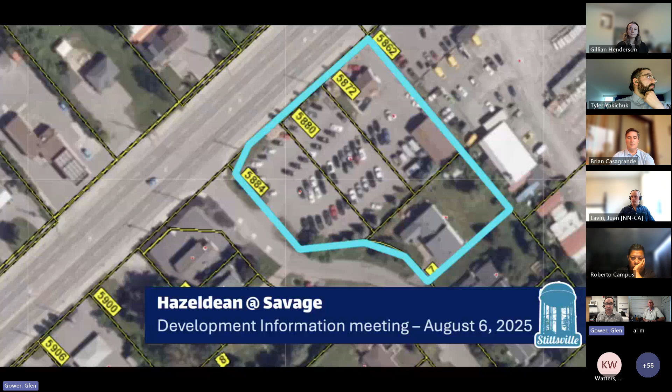There's a map there on the screen showing the location. I know there's a ton of community interest in this, so I really want to thank residents who've taken the time to join us this evening and to participate. I'll introduce you to the developer team in just a moment, but first I want to go over an agenda for what's going to be covered in tonight's meeting.

So this is about a proposed development at Hazeldean and Savage. There's 3 separate properties on Hazeldean Road and 1 property on Savage Drive. So tonight we're going to have a presentation from the developer's team, but the bulk of the meeting will be an opportunity for residents to ask questions and get more information about this development.

So when we get to that Q&A section, there's a few ways that you can participate. If you have a question or comment, you can raise your hand using Teams, and we can give you the microphone to ask the question directly. Or if you're more comfortable, you can type in your question on the Q&A panel that's on the screen. Kara from my office is helping to compile the questions, and I'll read out those questions on your behalf to the developer team so that they can answer those.

We're going to answer as many questions as we can during the time that we have. We also have some questions that were submitted by residents beforehand that we'll also include. And then any comments we receive either through this presentation or offline, we'll be compiling that and sharing it with the applicant team, developer team as well.

We are recording this, so a video will be posted to my YouTube channel after the meeting, which will also be available on my website, glengower.ca. At any time, if after today's meeting you have any questions or comments, you can contact me by email, usually the fastest way to reach me, at glenn.gower@ottawa.ca.

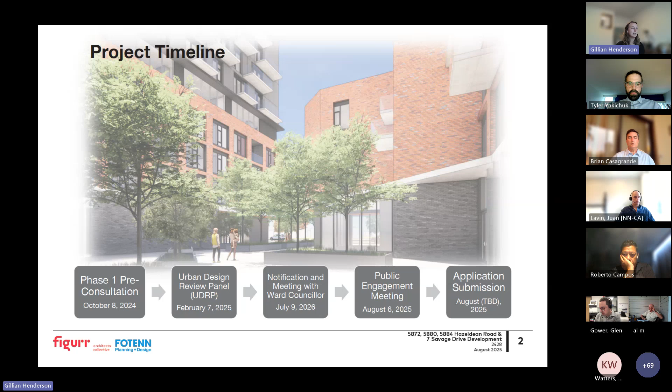I'll start with a quick overview of the project timeline. Back in October 2024, the applicant team met with city staff for a pre-consultation to go over the project and clarify application requirements and next steps. In February 2025, we presented the proposal to the Urban Design Review Panel for feedback on the design, which was incorporated into the next architectural iterations. In early July, we informed Councillor Gower about the project and met with him to discuss the application. Today, August 6th, we're holding the first public information meeting to share information, hear your feedback, and answer questions. Finally, we plan to submit the application later this month.

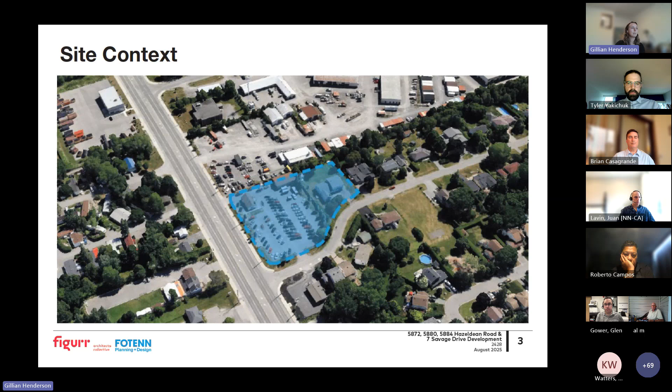The subject property is located at the southeast corner of Hazeldean Road and Savage Drive intersection and is comprised of 5872, 5880, and 5884 Hazeldean Road, as well as 7 Savage Drive within the Stittsville neighborhood. The front portion of the subject property is currently occupied by an automobile dealership, while 7 Savage Drive is occupied by a single-story detached dwelling.

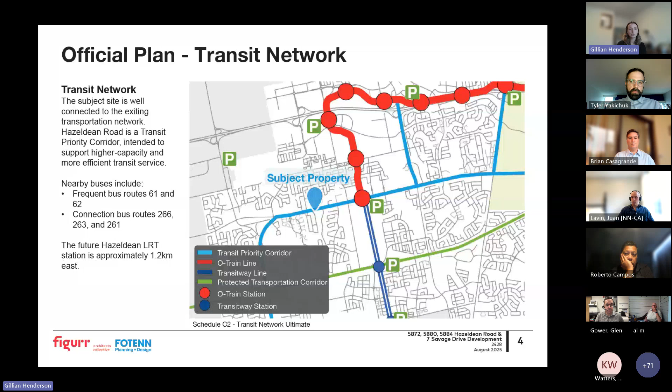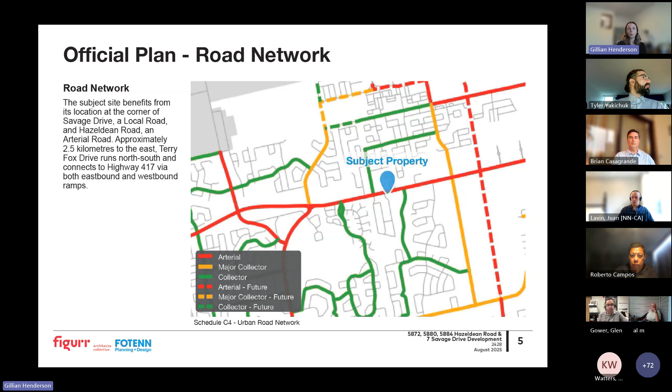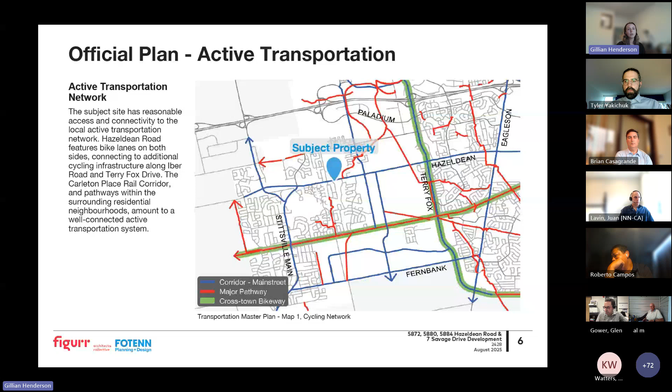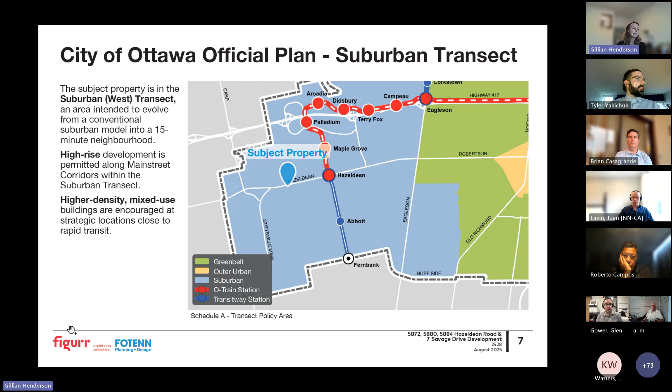The subject site is designated Main Street Corridor within the suburban transect. Main Street corridors shall provide a dense mixed-use environment with active entrances facing the corridor. Building heights up to 40 stories are permitted along Main Street corridors whose right-of-way is 30 meters or greater, and this segment of Hazeldean Road has a right-of-way greater than 30 meters.

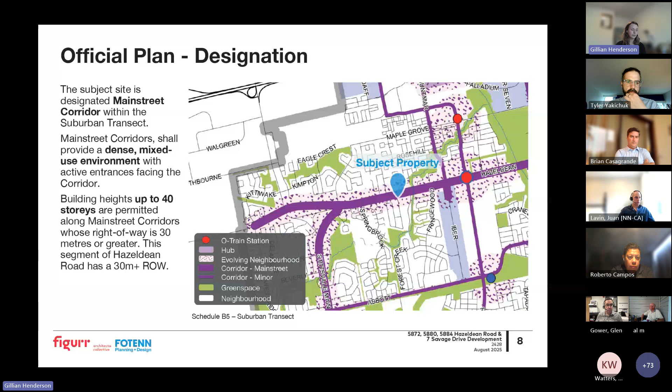The proposed development aligns with the current and planned context of the area, which envisions a dense mixed-use environment along Main Street corridors with heights of up to 40 stories where appropriate. This 3D massing model illustrates how the property fits within the evolving context based on existing policies. However, this will not happen overnight, and this is a very long-term view of what may occur over decades of gradual evolution. Additionally, the properties shown in this image may not develop as depicted in these renderings; these models illustrate potential built form under current policy and demonstrate how the proposed development fits within the planned and emerging context of the area.

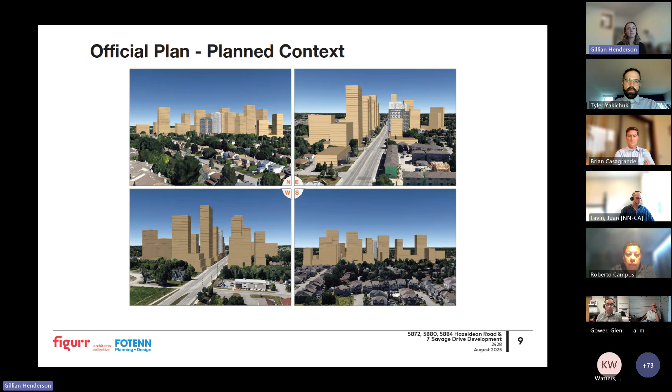The subject site is currently split-zoned general mixed use, subzone 14, with a height suffix of 11 meters, and residential first density, subzone D. The GM zone permits mixed-use development, including residential, commercial, and institutional uses, generally serving a broader area and allowing for larger occupancies, provided that potential impacts like traffic and noise are appropriately mitigated.

The entirety of the subject property is proposed to be rezoned GM with an urban exception. The amendments required to permit the proposed development are high-rise development, increased floor space index, reduced rear yard setback, and reduced minimum required resident, retail, and visitor parking spaces.

Under the draft new zoning bylaw, the subject site is split-zoned Main Street corridor, Main Street Zone 2, height suffix 11 meters, and Neighborhood Zone 2, subzone D. The Main Street Zone 2 will largely function as the updated version of the arterial Main Street zone from the current zoning bylaw. It allows for a broad mix of uses along wider main streets with larger lot sizes, including high-rise development, where it fits the surrounding context and also aligns with official plan policies.

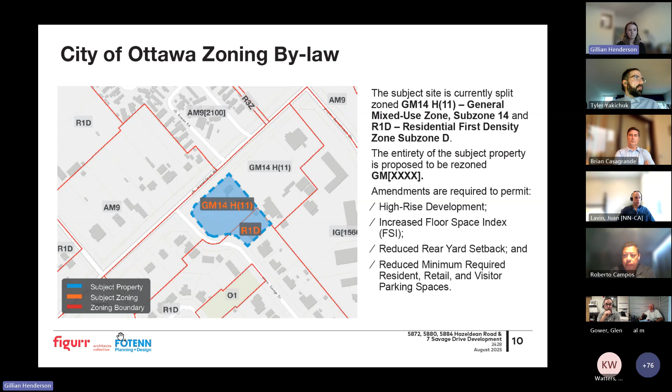The proposed height is supported by the site's location along a Main Street corridor, as well as the generous lot depth and area of this particular site, which make it suitable for high-rise development. A strong built form transition is achieved through a low-rise podium, strategic tower placement, and wide surrounding rights-of-ways, which provide ample separation from nearby properties.

The planned context of the area anticipates high-rise buildings of up to 40 stories along main streets in line with official plan policies.

From an urban design perspective, the building uses a tower floor plate of under 750 square meters to minimize shadow impacts, and the tower's orientation helps preserve views and privacy. The low-rise podium also enhances the pedestrian experience at the street level.

Furthermore, the proposal transforms an underutilized brownfield site into a vibrant mixed-use development that aligns with the city's vision for intensification along Main Street.

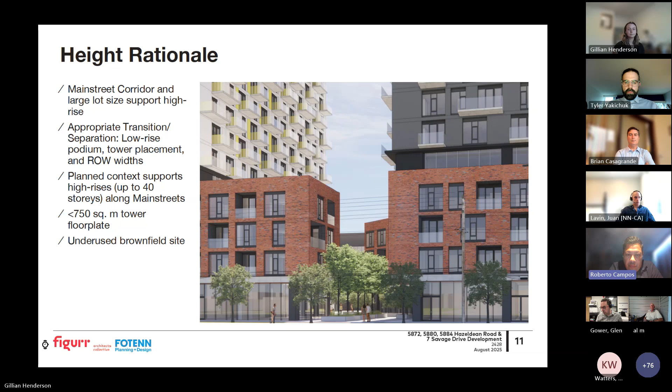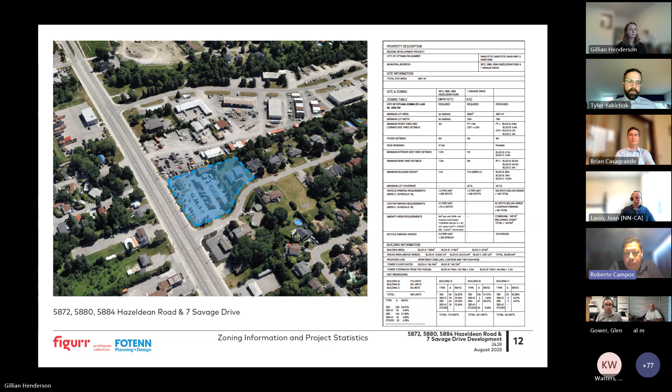As mentioned, the proposed site is located with two properties along Hazeldean Road and one at the rear of those properties at 7 Savage.

Here are some photos. The current use of the property is a car dealership and a single-family home at 7 Savage. Immediately to the northeast is another industrial-type used lot that includes a collision repair shop and also a granite supply store. You can see some photos here of the views along Hazeldean Road, and then the bottom two looking down Savage.

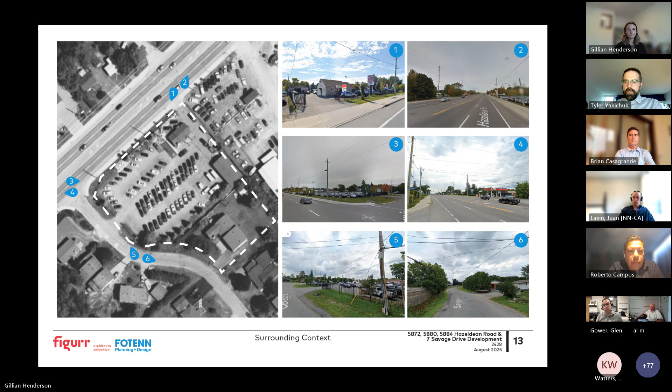The proposal envisions in total 3 buildings. What we're calling Building A, at the very intersection of Savage Drive and Hazeldean, is proposed to be a 19-story building, sitting on top of a 4-story podium.

What we also placed was Building C, a 4-story building, pretty much where the 7 Savage property would be. This helps to create a transition of the massing between the existing neighborhood immediately to the south, and as we transition north towards Hazeldean Road.

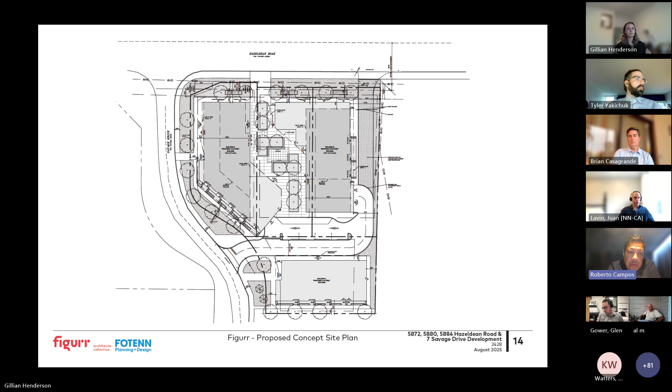This was part of the strategy in the overall site planning. As mentioned, there are right-of-ways and hydro lines that ultimately determine the placement of the buildings along Hazeldean. As we go through the plans, we'll see how the programs work — the ground floor facing Hazeldean is predominantly either retail or very active uses and entrances.

This is a view looking down Hazeldean, facing east as Hazeldean works its way to the intersection with Savage. The idea is to have a very transparent ground plane and a pedestrian, more urban podium level before the beginnings of the high-rises above.

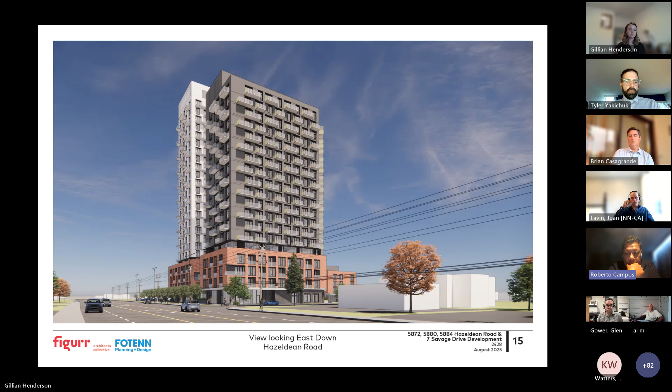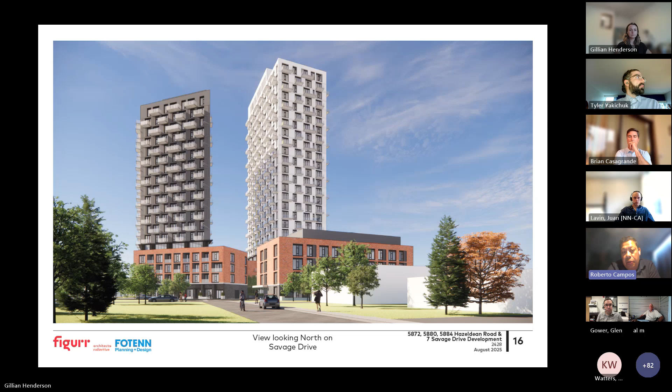This is a view looking down Savage. Part of the placement strategy was to keep the thinner sides of the buildings facing the established neighborhoods, while meeting the requirements for high-rise building guidelines regarding tower separations — not only from each other on the property, but also from neighboring properties that may be developed in the future.

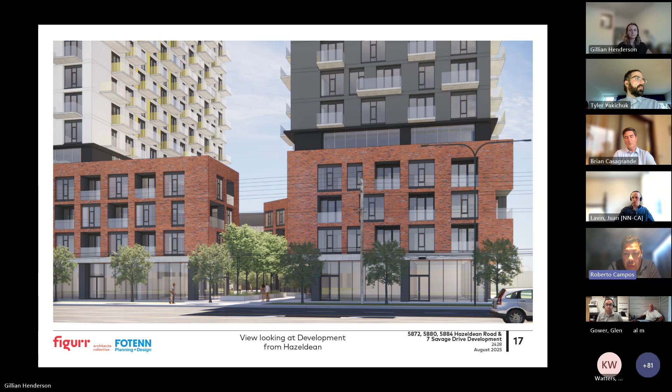Looking now towards the properties directly on Hazeldean, you can see the visibility of the public park space, which can be used either by tenants or potential visitors to the ground floor units.

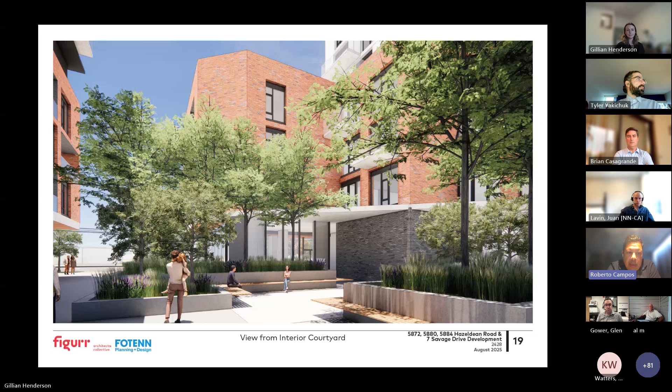This is a view inside that connecting knuckle park space, showing the effort to get as many trees and green space into the area. Because there's a parking garage below, the trees are placed in raised planters to ensure the parking spaces below can function properly. The intention was always to provide as much green space and park space as possible on this lot.

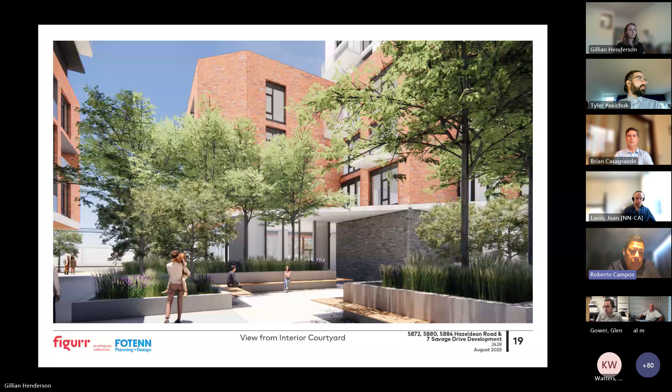Some early conceptual sketches looking at that knuckle space.

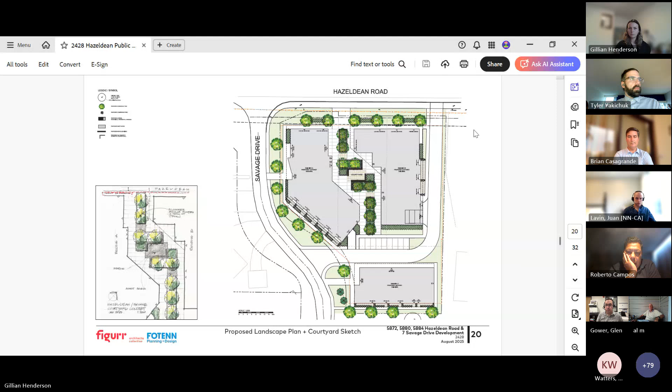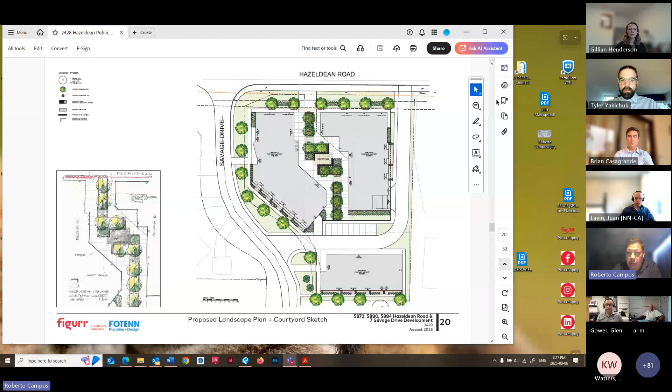Oh sorry, I think we lost the presentation there. Can we get that back, or do you need me to share? Sorry, one second, technical issue. Don't know what happened, but I'm sharing again. Thank you. No worries. Yeah, again, always looking at how we can try to create this connector between the two buildings. Do you need me to share the slides, Gillian? Oh no problem, sure — why don't you take over, Roberto? Okay, sorry, no worries, let me just give me two seconds here, I'm just going to get to that slide before I start. Hopefully everybody can see the screen. We can, yeah, okay, alright, just gotta move some things here.

We'll run quickly through some of the planning. We tried to take advantage of the limits of the lot to generate as much parking as possible across two levels — we're proposing a total of about 230 to 240 cars in that range. There's a total of 456 units across the 3 buildings.

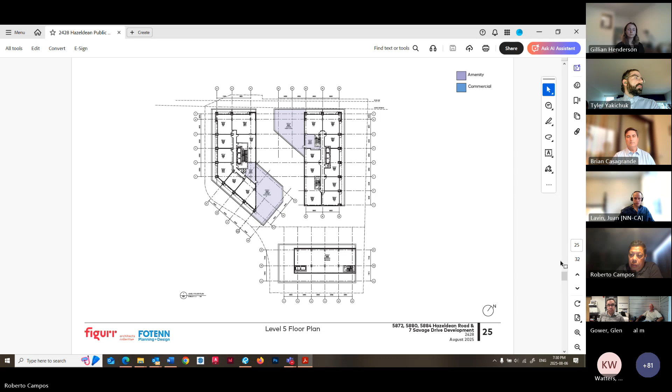And then as the buildings start to go up, some sections. And a section looking northeast against Hazeldean.

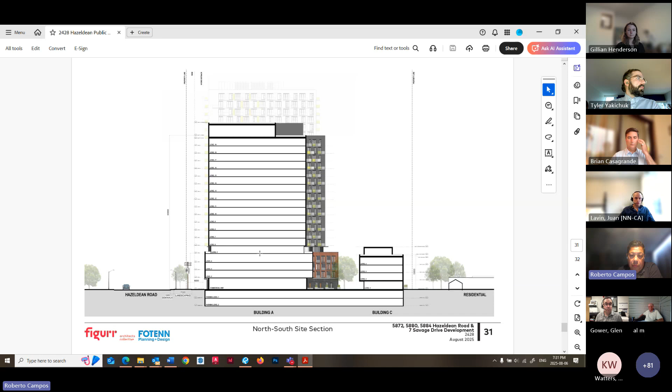Again, we do have a right-of-way line that's here, but at the end of really what's dictating facade location is the hydro. There is hydro power lines here, and hydro has very, very strict setback requirements that we must provide. And then at that point, we do have building setbacks in order to generate that 4-level podium.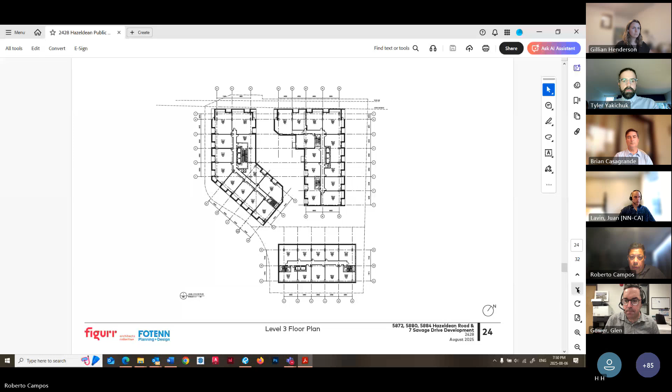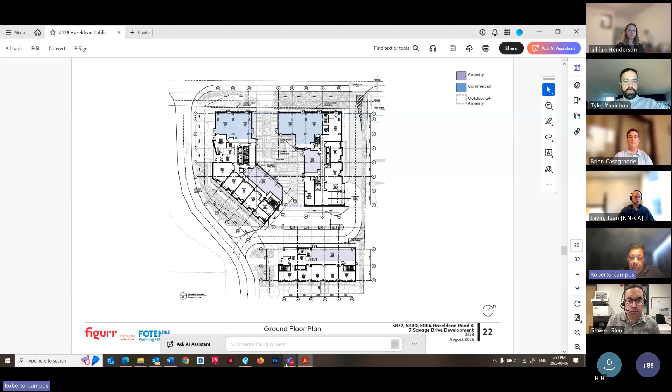Absolutely, yeah, here, I'm just going to move a couple of things here. So I'll actually go back to... it just kind of stalled a second there. So we'll start with the ground floor. Again, people would access the site through this road. If you're a quick visitor, there's 4 spots available right here, as well as what we call a lay-by drop-off here. But people accessing the underground actually come this way and then underground to a ramp that brings you down.

Here's the ramp right here, which brings you down. And as you can see, the dashed line you're seeing all the way around here is the property line. Now, what we can't build is in the right of way into the future. That ultimately becomes a new de facto property line, because the idea is that as the city updates Hazeldean into the future, that area of land is allowed to be used by the city to provide additional mass transit, tree lanes, bike lanes, updated sidewalks, whatever they feel is important to the long-term vision of Hazeldean Road.

And so, as you can see here, we have to limit our ability to build to that point. And then ultimately, we've built pretty much as far as we felt we could build onto the site. It's encompassing, I would say, 90% of the property below ground as a parking garage. And so basically we would just provide a second level and provide whatever we needed on this. So this is the P1 level, this is P2.

So on the P1 level, you'll also see garbage rooms. Garbage gets collected directly in the buildings, either through building C, B, and A. They have their own garbage rooms. Ultimately, the owners of the building would have to arrange on the day of garbage pickup to also haul those bins out ready for pickup. But that's all part of the parking garage experience.

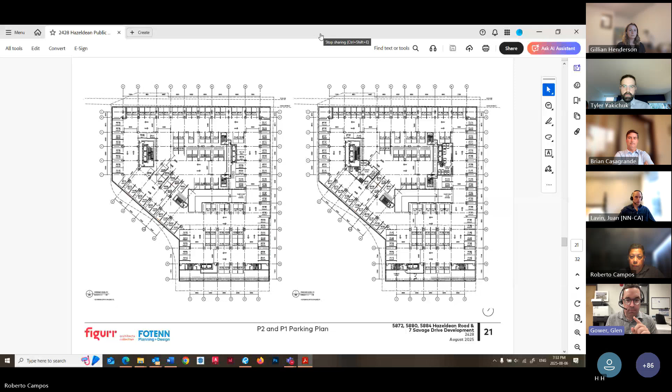They're both about Savage Drive. There's Debbie asking about parking restrictions on Savage Drive, and Lukas asking about on-street parking on Savage for commercial. I think I can answer those quickly.

On-street parking for commercial is possible. It would have to meet city requirements in terms of safety and sight lines. So that's to be determined. The city would have to evaluate that.

In terms of parking restrictions on Savage, I understand there's a concern about overflow parking onto Savage. The city does have a process to look at parking restrictions. A similar example happened over on Victor Street, where there was a resident-led petition process to restrict parking on one side, during the construction of the new townhomes at Hazeldean and Victor. So there is a process the city follows.

It may not surprise people to know that parking is really controversial. Some residents would like more on-street parking, some would like less, and so the city has a petition process that we follow to gauge resident feedback on that.

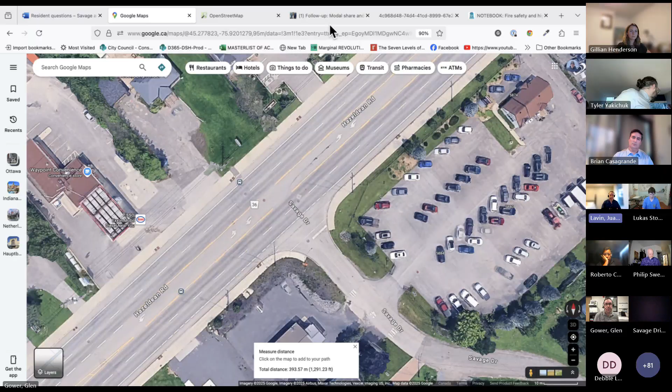Go ahead, Juan. Yeah, so using industry standards, we've done our trip generation - how many vehicles and trips we forecast to be developed by this development. We're forecasting less than 2 vehicles per minute. That's at the absolute peak hours, the heaviest AM peak hour and the heaviest PM peak hour. Outside of those hours, the traffic volume is going to be far less than that.

This is based on our modeling. So we've done modeling including the existing traffic volumes gathered from 2025. We've layered on all the other known area developments and added background traffic growth to account for additional growth. So we've added all these layers of future traffic growth, and even with all this added, the way the intersection is currently operating would result in approximately 4 to 5 seconds of increased delay for people leaving Savage Drive. On Hazeldean Road itself, there would be no additional delays. So just for vehicles exiting and entering Savage Drive, as mentioned, it's very minimal.

And how can you say that when there's going to be this many cars coming directly out of Savage Drive, and you think that's not going to cause a problem for us to turn left or right? Like seriously, that's a major concern. This is just a small industrial, small community right here, and all of a sudden you're just putting all this on top of us.

I absolutely hear your concern. As mentioned, we're using industry standards to calculate the forecasted trip generation. This is used all across the city and it's validated quite often. We use a new trip generation guideline developed by the City of Ottawa using data directly from Ottawa. So as developments come on, they do their analysis and see how many trips were actually developed based on how many units were built. So the data is actually quite accurate in that sense, and all that is inputted into software we have to validate the data and see what the actual forecasted delays are.